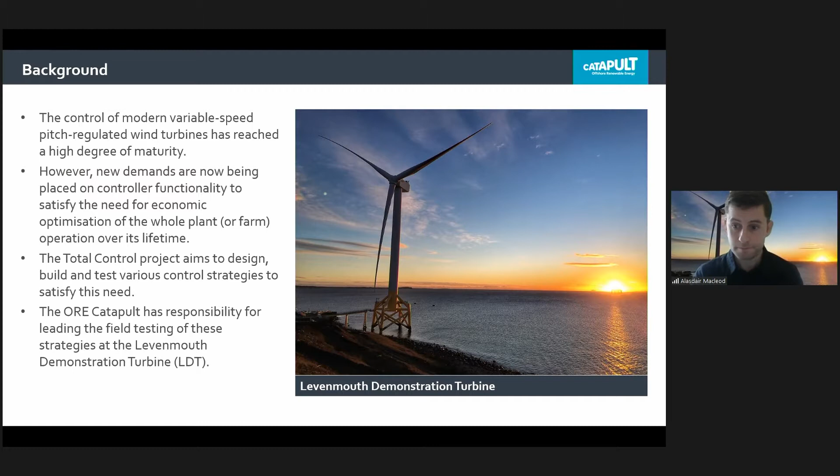As part of TotalControl, the ORE Catapult, we have responsibility for undertaking testing at the Levenmouth demonstration turbine, which you can see a picture of inset there. A little bit about the turbine, just to put it in context. It's the largest offshore open access research turbine. We use it for research, testing, training, all around research into operational improvement. It's a pretty big turbine, 7 megawatts. You can see the size of it there.

So it's a fairly daunting prospect to test some new control strategies in something this big. Particularly with the yaw testing going out to these high yaw angles, we were very unsure about how the turbine would react, what we would see in terms of blade loads and stuff. So we did a fair bit of due diligence to make sure that we could keep the asset safe and provide a good set of tests for the TotalControl project.

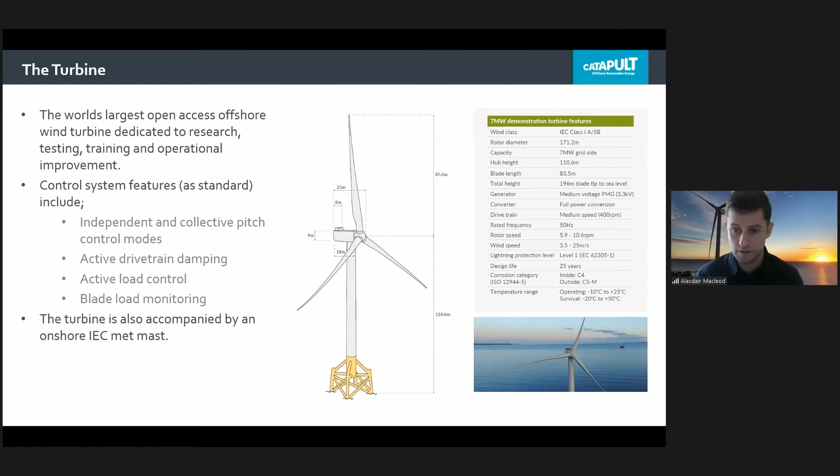The turbine itself already has collective pitch control, active damping, load control, and blade monitoring. And nearby, we also have an IEC met mast to give us a good understanding of the wind conditions in the area.

So what I'm going to talk about is yaw testing, or that's not really that accurate, yaw misalignment. So control of the wake by yawing the turbine out of perfect alignment with the incoming flow. That picture there just gives you an idea of what's going on. The red line coming in would be your incident flow field, but you can see the nacelle is not pointing directly into that. And due to that, the wake can be steered. So the idea is, in a wind farm situation, we can try and use upstream turbines to steer the wake around the downstream turbines to improve overall performance.

Oh, and one thing in there as well, for this control, what we had to do was sort of trick the wind turbine into thinking it wasn't yawed to stop the control system from fixing itself. So I use the term yaw error, which isn't wholly accurate, but it is used because within the controller, the turbine's yaw is corrected by the wind vanes on the nacelle. Those measure yaw error, or how out of line the turbine is.

So to implement this controller, we use the offset within the control system to basically trick the wind turbine to think it's pointing directly into the wind. So the idea is we change the yaw error offset by the certain number of degrees we want to move the turbine round.

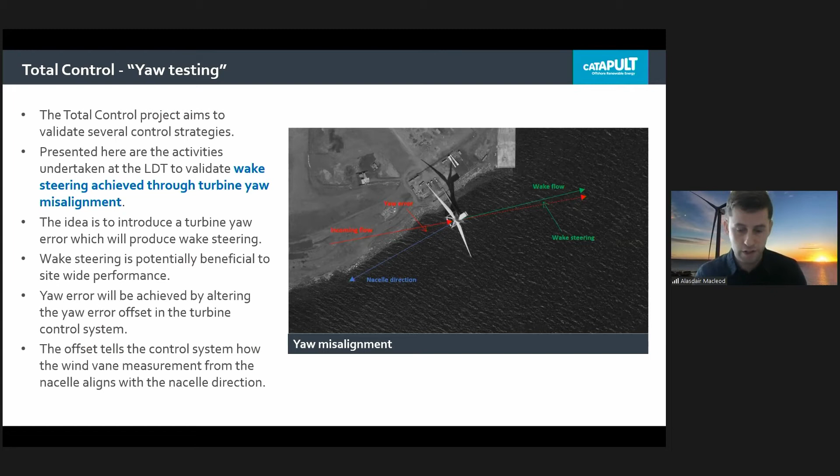As I said, we were somewhat concerned about the impact this could have on a turbine of this scale. So we did a whole bunch of historic analysis. One of the things I was intrigued about was whether we'd seen high yaw operation before, and in fact we had. The controller can be somewhat loose sometimes in catching up with gusts and stuff, and that's to protect the yaw system.

But we saw in the past a good bit of yawed loading, which showed very little change in fatigue loads or extreme loads. We were particularly worried about increasing fatigue load, increasing chances of stalling blades, and accidental loads causing shutdowns. So to mitigate those, we did a lot of historic analysis, which showed very little evidence of that happening, which was good. And then we also used that historic analysis to set load limits on our testing.

So during the testing, we were very closely monitoring the loads, the incident loads we were seeing, the fatigue loads we were seeing, and what was going on with the alarms. So before doing the tests, we had a whole set of load limits that if they were breached, we would shut down the testing. For ultimates, those were set at 25% greater than those observed historically, which was still well within design loads. And for fatigue, it was 20% greater. And again, that was keeping within design loads.

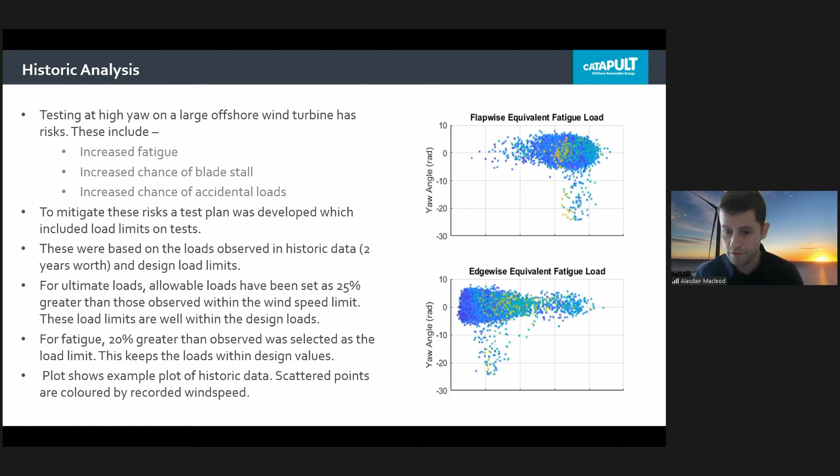Another challenge with the testing is we didn't have a live feed of LiDAR data. So on the turbine, there was a LiDAR installed for the testing, but it wasn't installed to support TotalControl. It was installed for kind of later analysis. So once we've tricked the turbine to think that a yaw error is not a yaw error, we have no recorded yaw error signal, so we don't know if we're actually achieving the yaw error we're chasing.

We did have a historic data set with a LiDAR on with some yawed operation. This particular plot here is just a day where we didn't have any operation, but the turbine was seeing quite high yaw error in a relatively low wind speed. So what we did was compare the met mast wind direction to the nacelle orientation from the SCADA system, and this gave us a fairly reliable measure of yaw error.

You can see the comparison there with the turbine sensor, this kind of dummy yaw error signal, and the LiDAR data. So that gave us good confidence that during testing we could get a fairly decent idea of the yaw error we were achieving, and then later down the line we could use the LiDAR to give us more confidence in the actual yaw that was achieved.

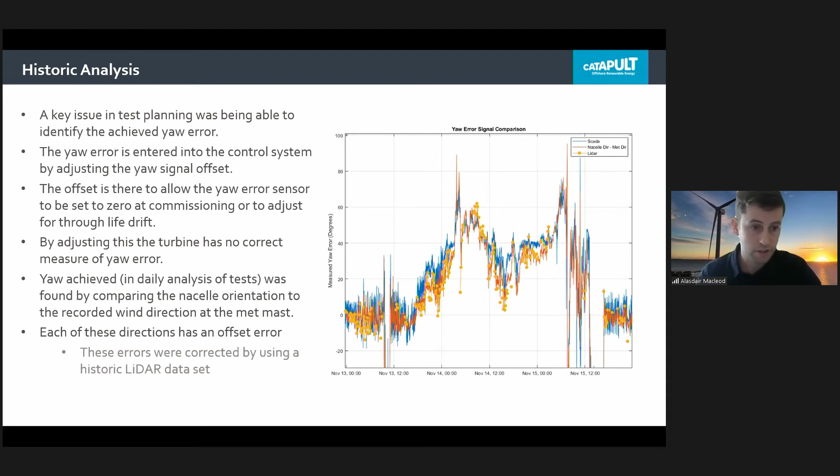So during testing, we were very controlled in the way we did it to make sure that we could protect the asset but still achieve the outcomes of the project. And so any given day we would have an appointed member from our team and an appointed member from the on-site operators. We would work together to set up tests, make sure we had everything in place in terms of safety, in terms of reporting. We were understanding what was going on with the wind using forecasting. And this would then be reviewed during the day.

And then to protect the turbine, we were interested in testing from a range of yaw errors from 0 out to kind of plus 20 degrees at a range of wind speeds. To ensure a smooth and uninterrupted testing period, we had pre-approved loading conditions that we could see within each test bin. So then if we were to fill in our bins and not exceed these conditions, we could move on to the next test safely and without having to go back for more approvals, to keep everything running smoothly.

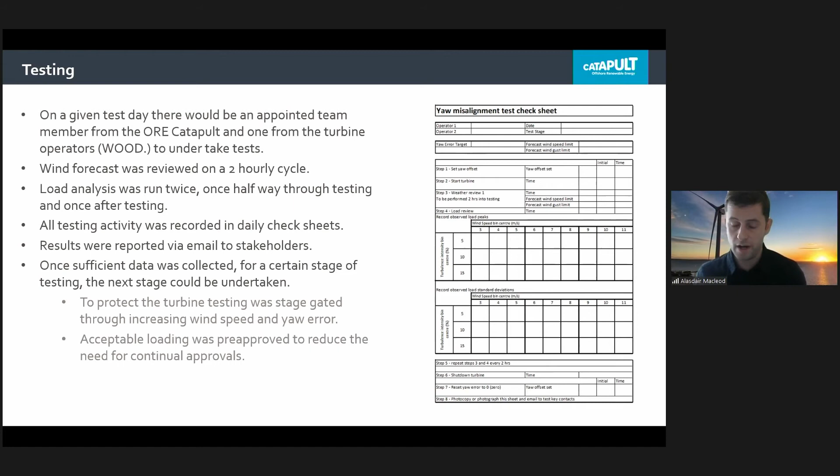So I'll talk a little bit about the data. So as I said, we had two sources of data. We had the SCADA data and the met mast data. As with everything, data is never perfect when you get it straight from the sensors. So we needed to clean, filter, and match up timestamps between those two things.

Actually, we were getting pretty clean data from both the SCADA system and the met mast for the signals we were most interested in there. One example maybe of something that wasn't perfect is within the directional data there from the met mast, there was quite a lot of noise or spikes on one of the signals, but this was cleaned up with a simple 1D filter. And also with the wind data itself, we needed to smooth out a good bit of the turbulence to get reliable kind of mean wind speeds.

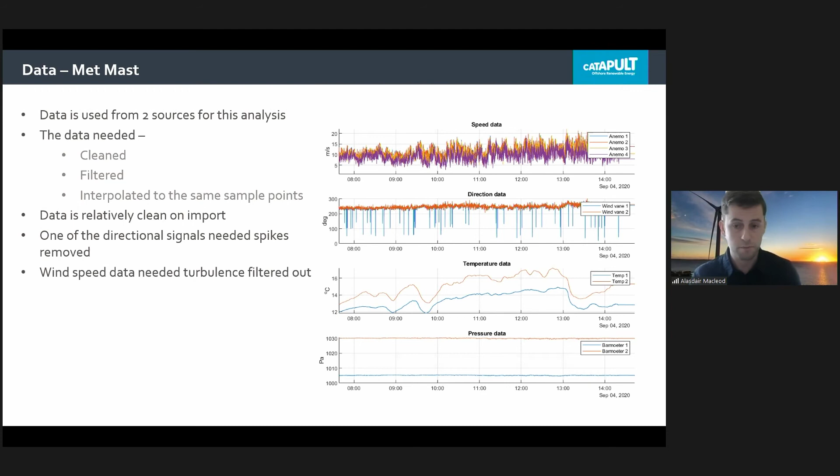So a quick example of some of the wind data in more detail from one of the days of testing, just to show how the yaw error signals and stuff were working. So you can see the top plot there is wind speed from a range of different wind sensors. They all match pretty well. One observation is that the met mast shows somewhat less variation in wind speed signal than the turbine. I suspect that's to do with the turbine anemometers being in the waked flow on the nacelle, whereas the met mast is a bit away, so should be seeing a bit smoother flow stream.

And then the second plot there is the various yaw misalignment signals that we had. You can see the 3 from the turbine, there's offsets on them, but generally, if you kind of imagine those meaned around 0, they're generally not showing much change. Whereas you can see at about 8 o'clock, we turned on our 10 degrees plus yaw error in our signal, and then we turned it off again at about 2:30. So you can see a very distinct yaw error maintained pretty well there through that signal.

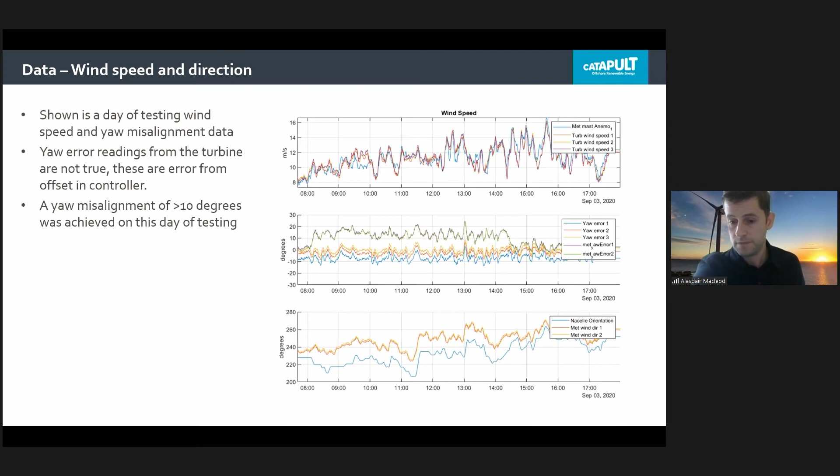And then the bottom one is just a comparison of the nacelle orientation signal and the met mast direction. So you can see generally the spikes in our yaw error would happen as the turbine tried to track changes in wind direction.

So what did we find as we went through those tests? A plot here of power against yaw misalignment that's colored based on density of points. Basically, the red line there is rated power. I don't know if it should have been surprising, but it was somewhat surprising to me that we didn't.

Alasdair, I do not want to worry you, but we are a little bit pressed for time. Can I give you just 2 minutes to conclude the presentation? Yep, I'm right there. I've got, I think, 1 or 2 more slides.

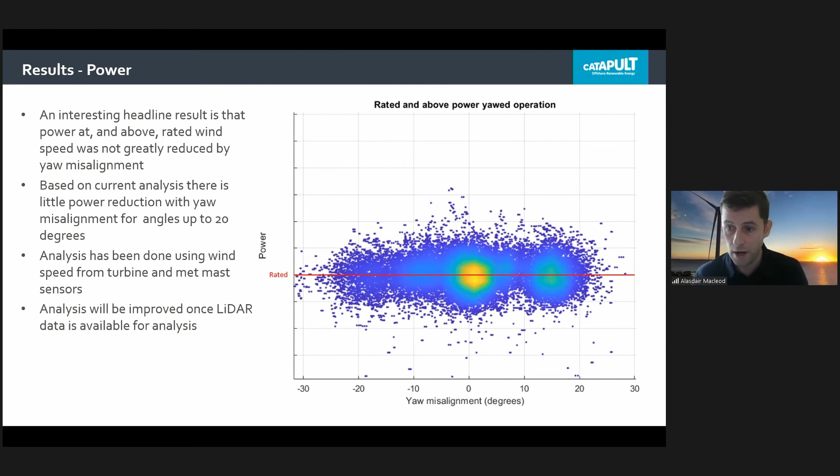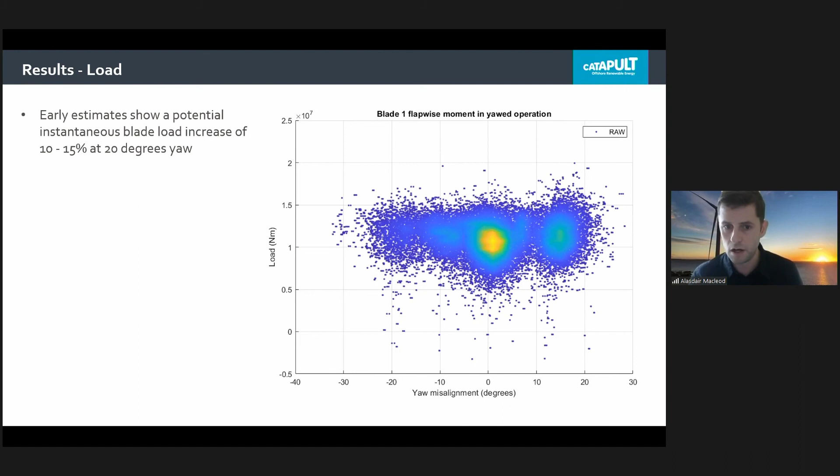Perfect. So, yeah, this plot basically shows the power output from the testing at and above rated, and we saw very little change in power, which is great. The next plot shows a bit of loading information. This is instantaneous blade loads, and there's 10 to 15% increase at the higher yaw errors of kind of instantaneous loading, and that translates to sort of a bit of increase in fatigue loading, sub 10%, but nothing too drastic, and still well within the design loads.

So outcomes from the testing: as ORE Catapult, it was a really good test on our ability to test kind of complex or out-of-the-box control strategies at a large scale. We found from our historic analysis that even in normal operation, we do sometimes see fairly large yaw errors while still producing without causing alarms or high vibrations or anything, which was quite interesting. We do see increased fatigue loading at larger yaw angles, but not at the expense of power.